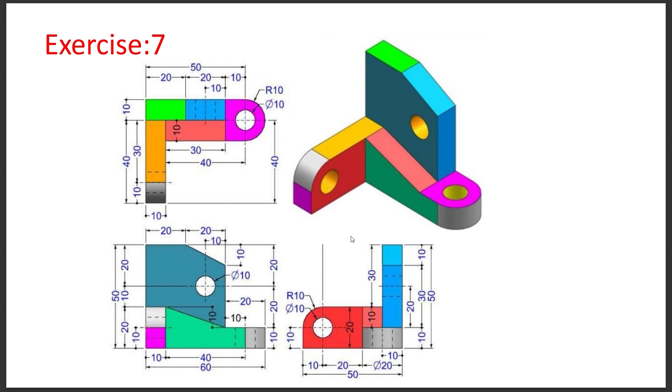So without wasting time, let us start our modeling using Autodesk Fusion 360. First of all, we need to create a new design, which can be saved by the name exercise 7, and we can save it to a specific location by the name of Fusion. Let us save it - you can see it is saved by the name exercise 7.

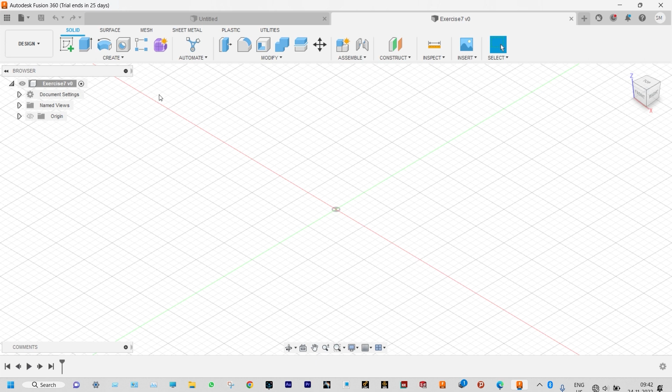And we already said we need to start from side view. So let us start sketch from here, and we can select that specific plane. Done. Let us see the drawing again.

To understand it, we need to draw one rectangle of length 50 and breadth 20 millimeter. This part is to be made first, and this view is here. So we need to make a rectangle of length 50 and breadth 20 millimeter, and in between we need to provide this circle of diameter 10.

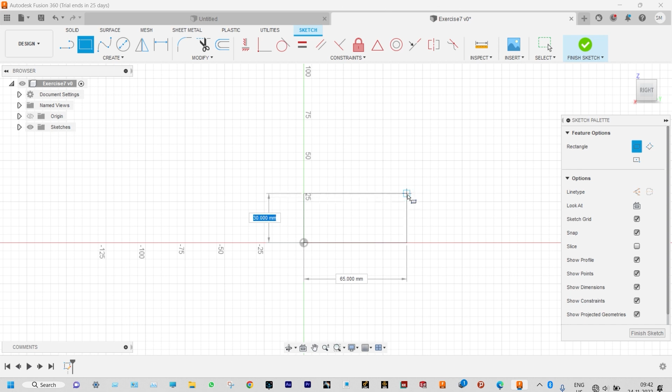Starting with rectangle, initially we'll draw a rectangle with any dimension, and later on we can provide a smart dimension to this one - length will be 50, enter, and breadth will be 20 millimeter, 20, enter.

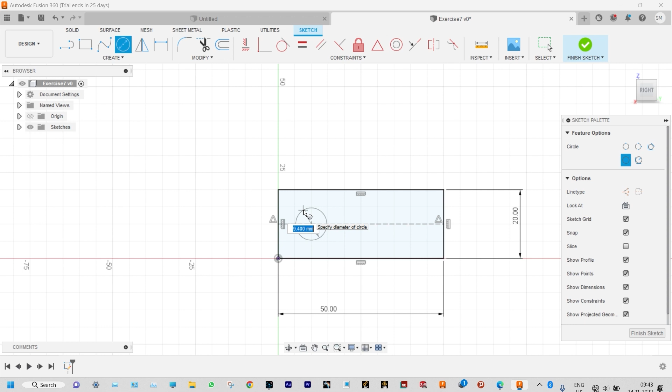Here in this case we need to draw one circle of diameter 10 millimeter. Let us provide smart dimension to this one as 10, enter. We need to have a specific location of this circle, so from vertical and horizontal location, both cases it will be 10 millimeter away.

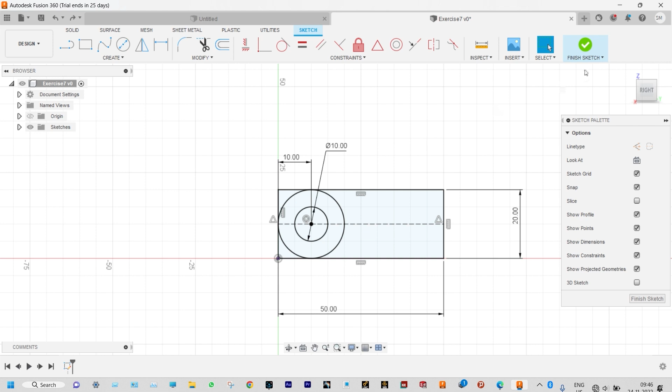Done. Here also you need to make one circular arc, let us make a circle here itself. Our initial sketch is ready, so let us finish this one, and that is to be extruded to a specific depth of 10 millimeter. So starting with extrude, we can select specific areas, selected, and extrude to a depth of 10 millimeter, 10, enter.

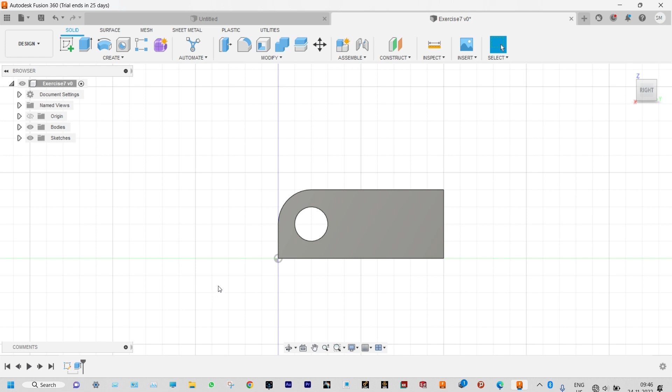We have already extruded this one, let us see this. So one part is made. Now you can see the drawing again, and in this case we need to start this one.

That means we can better start with front view - we need to draw this part, and that to be extruded again. So we're planning to make this part. This part we have already made, and at the back face of this one we need to sketch this part.

While sketching this, you can check the length will be 50 millimeter here itself. You can see this one is 40 millimeter and this one is 10 millimeter. So while drawing this, the length will be 50, and then we need to move off by 10 millimeter, and again move backward by 20.

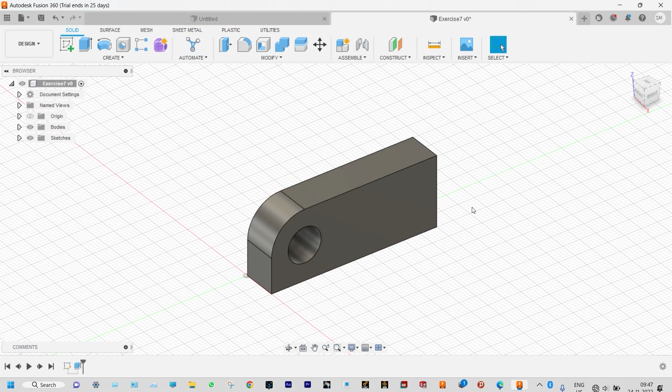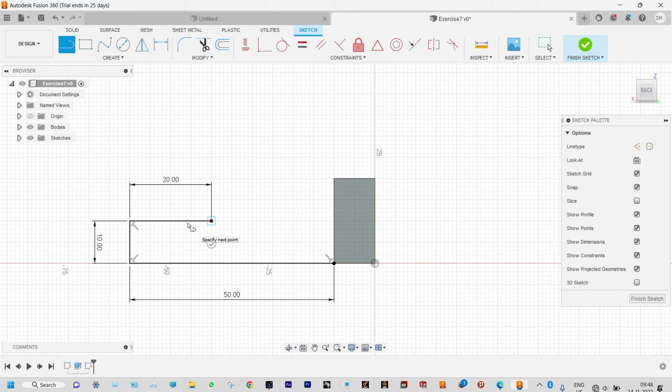So let us rotate this one, select the specific plane, and start with sketch. We are starting with line. We need to move left hand side by 50 millimeter, then move up by 10 millimeter, then move again 20 millimeter in the right hand direction, enter. Now we can join this with the vertical position, and finally close this drawing, enter.

Done, our drawing is complete. So finish sketch, and that is to be extruded to a specific depth. This is our sketch. Let us see the previous drawing to check the depth of extrusion. In this case we need to extrude this by a depth of 10 millimeter, because this one is 20, right? It has to be extruded to a depth of 10 millimeter.

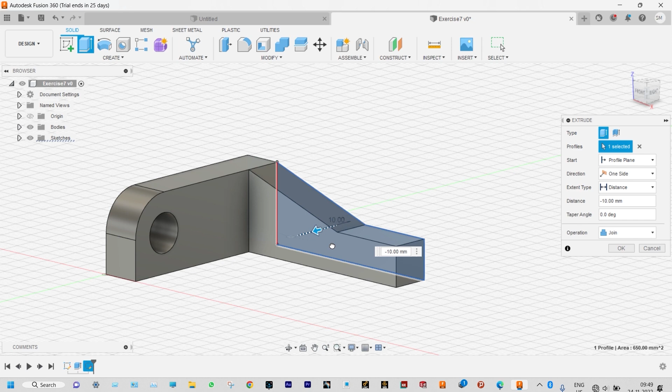Okay, so extrude, select a specific area, and we need to extrude in the front direction. You can change the direction from here, it will be extruded by a depth of 10 millimeter - you can provide -10. Done, complete. Let us see the drawing again.

Here in this case we need to provide one semicircle, having radius of 10 millimeter that we provided here itself. So we can select this one and provide a fillet of radius 10 millimeter. You can select both edges and provide fillet of radius 10 millimeter. Done, again you can see the drawing.

At the top surface of this one we need to provide one circle of diameter 10 millimeter again.

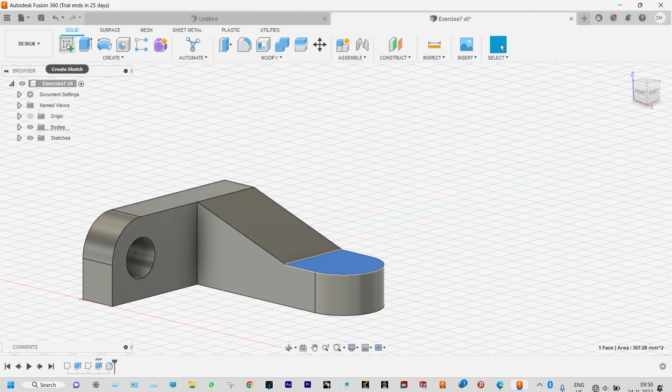Let us select that specific plane and start with sketch. Let us start with the circle, and you can provide smart dimension to this one as 10 millimeter.

Sketch is finished, so we can remove material from this using extrude in the negative direction. Let us select that specific area, and we can extrude in the negative direction by 10 millimeter down, so it is -10. Enter. You can see it.

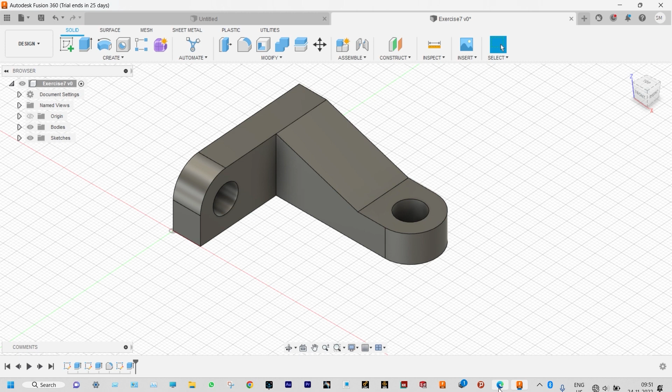So we have made two different views. Let us see the drawing again. Now the front view to be made, right? So again we can start from this location.

We have to move up from here to a height of 30 millimeter. Then again we need to move horizontally by 20 millimeter, and again from this location also we need to move a distance of 30 millimeter. From here to here 30 millimeter, and here one kind of chamfer is there, right?

Instead of making a chamfer here itself, we can make this sketch and that to be extruded to a depth of 10 millimeter. Okay, so we're starting from here again. It will be 30, 20, and from here also again it will be 30.

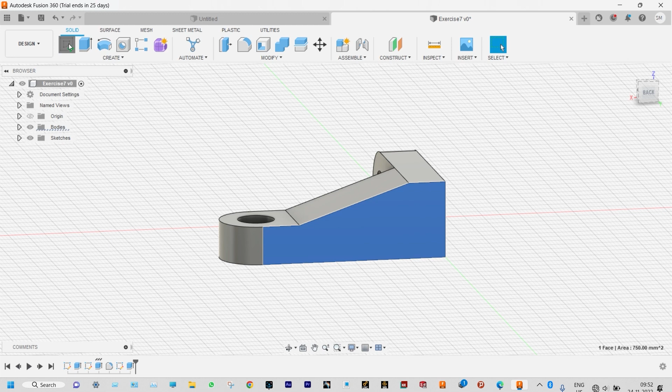Select that specific plane, starting with sketch. So starting with lines, it will be 30 from here. 30. Enter. Then it will be 20. Enter. We can check the drawing again.

Again from here we need to move a distance of 30 millimeter, right? And this location from here to here is 20 millimeter. This line we have already made.

Now we need to start with this line, and the location of this one is, we can check it from the end position. It is actually at a distance of 30 millimeter, or you can say from the center of this circle it is at a distance of 10 millimeter.

We need to move off a height of 30 millimeter, right? Because this total is 40. 40 minus 10 is 30. From the center of the circle at a distance of 10 millimeter, we need to move vertically off to a height of 30 millimeter.

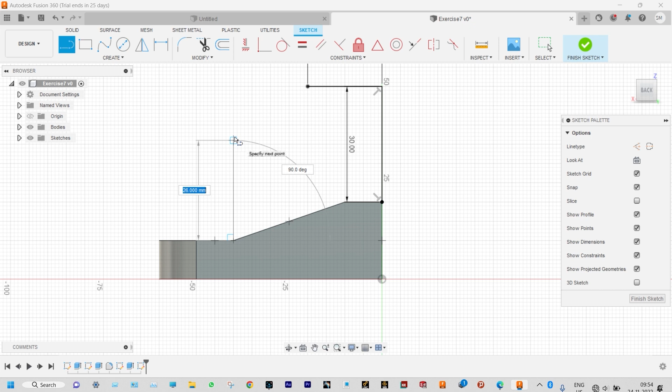So this is the center. From here at a distance of 10 millimeter, we need to make a line of 30 millimeter, right? Let us start from here. So starting with line, we need to move at a height of 30 millimeter, right? 30. Enter. Now we can join this one.

Right? It is complete. Now we can see again at a specific location we need to provide this circle also. So starting with circle, and you can provide circle in a specific location. Later on we can provide the desired position. We can provide smart dimension to this one as 10 millimeter.

And we need to provide the desired location. Let us see the drawing again. So from this line it will be at a distance of 10 millimeter, and from top side it will be at a distance of 20 millimeter.

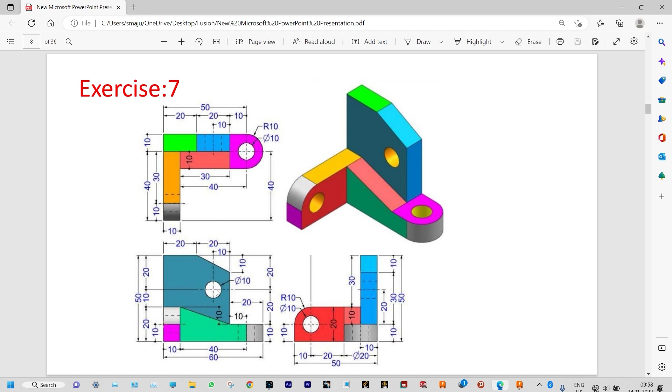Smart dimension to this one, from here to here it will be 20 millimeter, and from this vertical line it will be at a distance of 10 millimeter. Done. Location of the circle is defined, so you can finish the sketch, and that to be extruded to a depth of 10 millimeter.

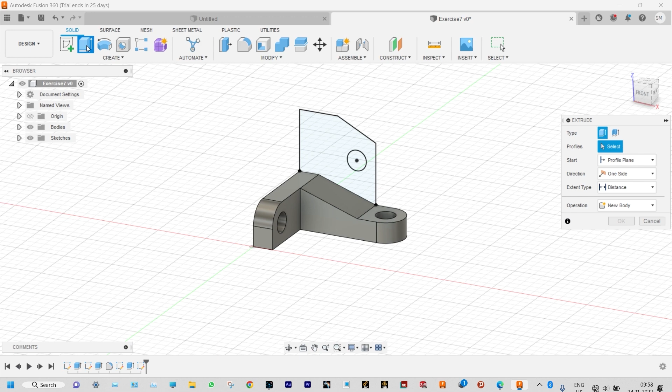So starting with extrusion, and let us select the specific area, and this one to be extruded in the front direction, and it will be -10 millimeter. Done. Our model is ready, right?

You can see it. Now to provide a better appearance, you can make metallic appearance. So hit A, and you can change the appearance to metallic, and let us make this one with brass, polished brass, right?

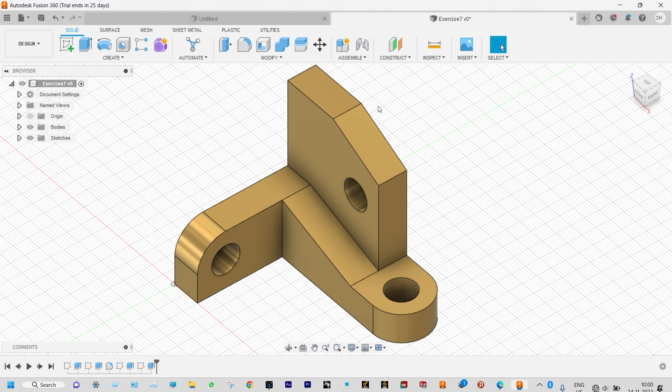So this is our model. Okay, this was a very simple model. Initially we started with the side view, and we have created this part. Next to that we have created this shape, and that was extruded to a depth of 20 millimeter. And again, finally, the back side of this one, we have created this sketch and finally extruded to a depth of 10 millimeter, right? So this one will conclude our 7th video.